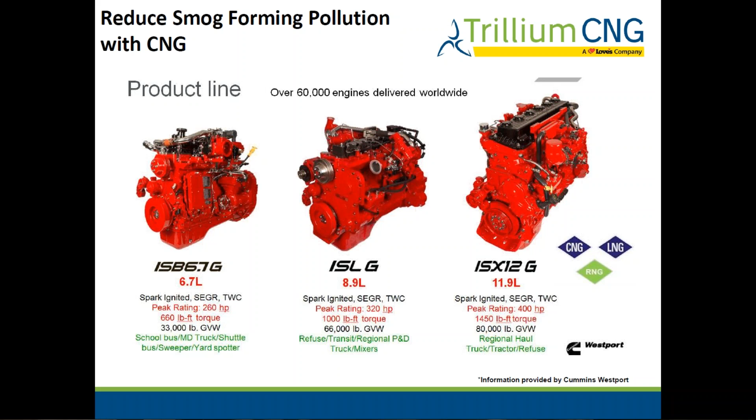These engines are available for transit fleets, refuse fleets, and a variety of other regional haulers. The larger engine, the 11.9 liter ISX12 G mentioned on the previous slide, all the way to the right, will be available at that same emissions level in the first quarter of 2018.

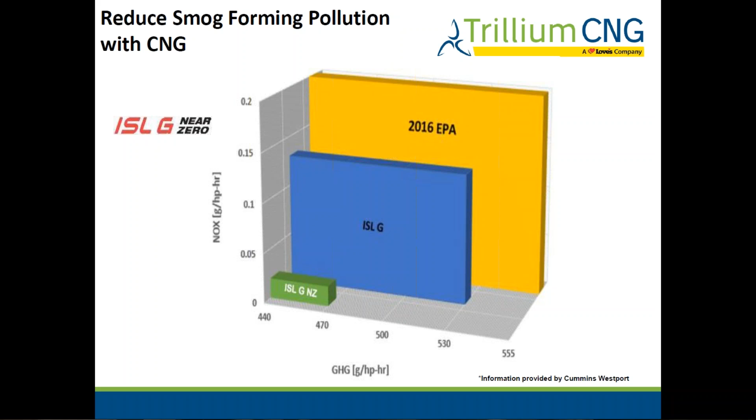Adding to the environmental benefits of natural gas is the renewable footprint, or the carbon footprint, that you can get with renewable natural gas. Let's go to the next slide, please.

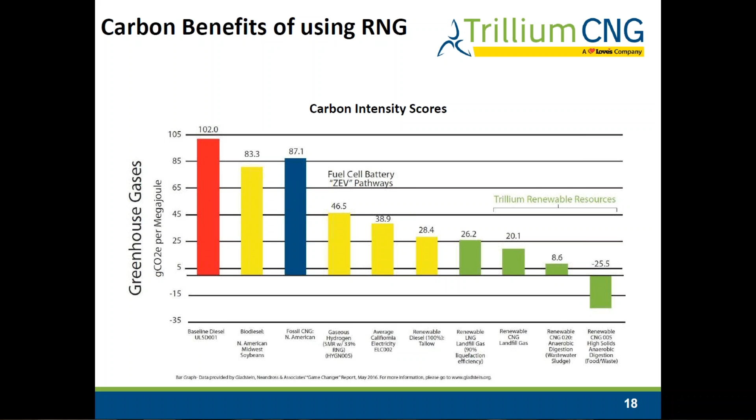So there's tremendous potential for the marketplace to move renewable gas into the transportation space. There are both federal and, in some states, programs that allow you to monetize the value of this gas and bring down the cost of your fuel even further. So if there's an interest in reducing your carbon footprint, providing additional sustainability to your logistics portfolio, and monetizing renewable fuel to bring down the overall cost of your fleet, renewable CNG provides the opportunity to do that.

So this is part of where the rubber hits the road. At this time, which is a remarkable time in the history of alternative fuels, there's never been a better opportunity to take advantage of state and federal incentives to help convert a fleet over to compressed natural gas. The benefit of this Clean Corridors program is going to be to leverage those funds as best we can to the benefit of fleets and private consumers looking to move over to alternative fuels. So now is the time for us to take this domestically available fuel, move it into the marketplace, and do so with the best incentives that have ever been available in the marketplace.

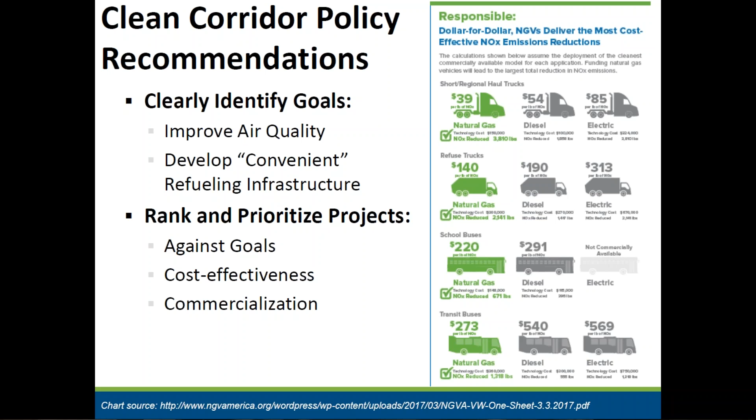Just to recap on some of the funds that are out there, I touched on the VW funding a little bit. We had limited time, so I didn't go through the DERA funds. I'm sure most folks are familiar with that, and there are a variety of state programs that vary state by state. But coupling these programs together into a bundle that can be utilized by fleets and other folks to move into the alternative fuel space will be the most effective way to utilize those dollars. And finally, to expand the role of the Clean Cities programs and coordinators. These are regional folks that are regional experts. They know the fleets and customers that are interested in moving over to alternative fuels. I think they can be used very effectively to align funding with prospective customers. I know we use them, but we don't communicate well with our competitors for obvious reasons. Using the Clean Cities coordinators or organizations as a conduit between competitors could be very helpful in identifying who and where would be the best locations to put fleets and direct vehicle dollars.

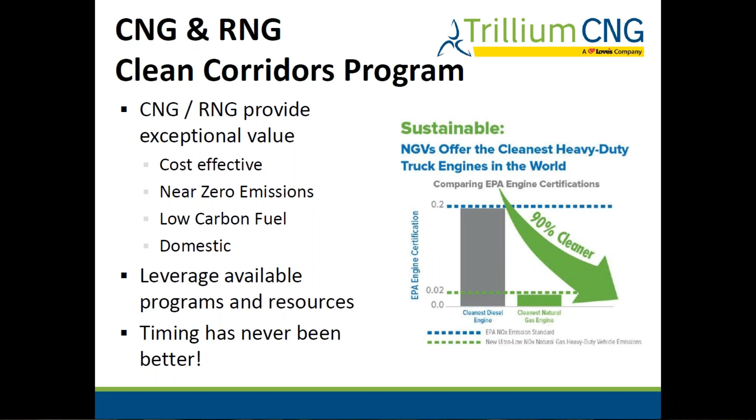I've got one last slide, just a wrap up here. Just to recap again on the value: CNG and renewable natural gas are very cost effective. They provide near zero emissions on NOx for point source emissions. It's a very low carbon fuel if you're using the renewable option, and the fuel is domestic, all things that are very good for our economy. In this program, I think we need to do everything we can to leverage all the available resources, including all of the federal and state incentives and the Clean Cities people to help bring these things together, and the timing has never been better. And with that, I'll turn it over to Susan.

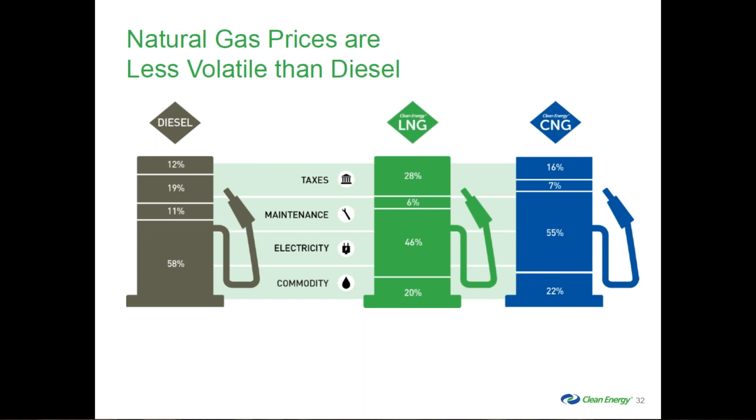So we offer all of these fuels: CNG, compressed natural gas; LNG, liquefied natural gas, which is supercooled gas stored in a thermos, basically; and Redeem, which can be sold either as CNG or LNG, and that is the renewable product I mentioned earlier.

What are the benefits of switching? Well, if you switch from gasoline or diesel to natural gas, it saves you money, you can dramatically reduce your emissions, and it benefits everyone. The community has quieter, cleaner vehicles on the streets. It's economical, it's abundant—we have a lot of natural gas in this country, not including our renewable sources—and it makes for a cleaner environment.

So people always say, well, how much cleaner? I'm going to show you a slide in a second. It's significantly cleaner. Safe—there's 17 plus million vehicles around the world fueling with natural gas. It's domestic; almost all of it comes from our country here. Fleets or shippers looking for green fleets give an advantage to people who operate natural gas trucks, and of course there's price stability and reduced operational costs over the long term.

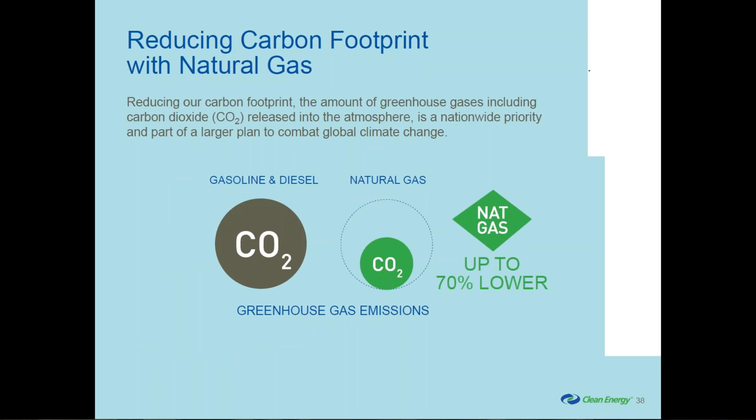So fueling the transportation industry—what does it take? Well, if you go from the well or from your renewable source to the station, you need pipelines, plants for the LNG, local utilities, compressors, the fuel itself, and you have to get it to the station. So what do we do? We build those—we have plants, we provide gas and LNG, we have stations. On the CNG side, we build compressors, work with local utilities and pipeline operators, and make those stations convenient to use.

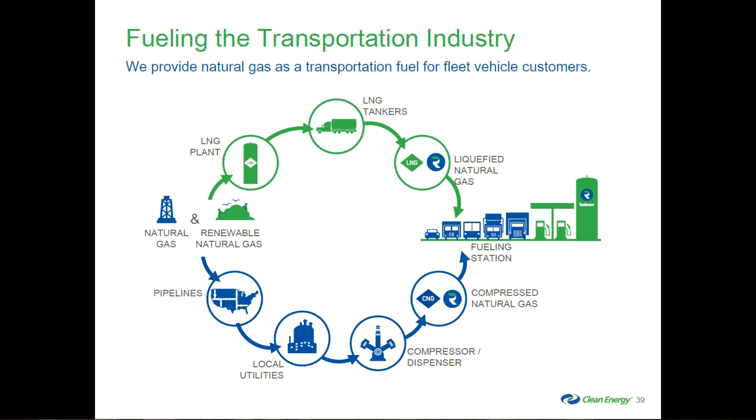But none of it matters if you don't have an engine. And as Bill said earlier, this new Cummins Westport near zero emission engine is a game changer. That engine, used with renewable natural gas, means you are driving the cleanest engine available today.

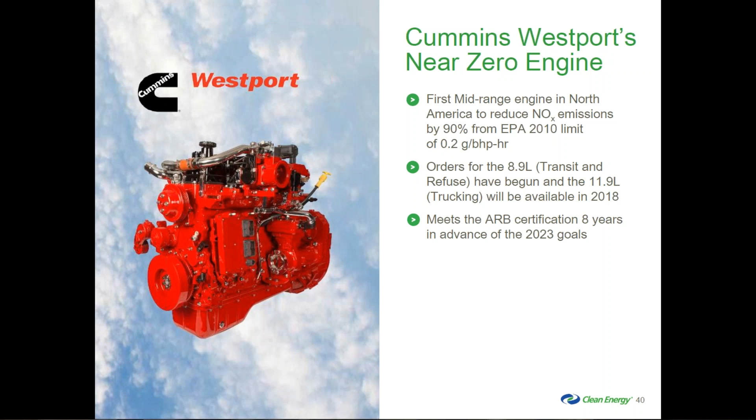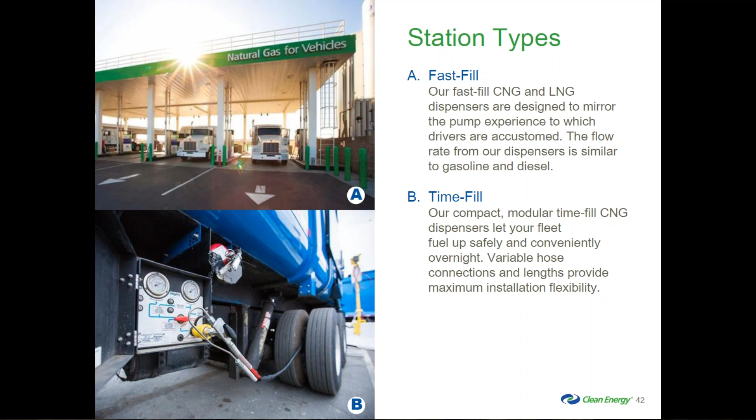For those of you on the call that don't know, there are two types of stations, and this is important. There are fast fill stations, which are your on-the-road stations—a truck pulls up, fills up, and continues on the road. And then you have time fill stations, where you have a window to fuel your vehicle while it's parked for several hours, and it fills up.

I don't want to go through the components of each station, but I know many of you are going to download these. For those that don't know, there is a difference with a CNG station: the gas is compressed, put into tubes, and then pumped out to the truck.

An LNG station: the gas is cooled at an LNG plant, pumped into that storage container, and then pumped out to the truck.

An LCNG station is the same as an LNG station, except it has a vaporizer. It heats the gas, puts the mercaptan in it, and sends it out to the trucks. If anybody has questions about any of those stations, please feel free to ask me later, but I don't want to take too much time with that.

So what are the differences? LNG is a diesel-like experience. It's fuel consistency, no problems at all. It's 100% free of impurities because they super cool it - no water, no compressor oil carryover, none of those problems that you have. And boil off is no longer a concern.

LCNG, again, fuels quickly - not as quickly as LNG, but it fuels quickly because that gas is just heated up. You have the same quality of gas because the inconsistencies or the impurities have been removed. No problems there. And then you have your CNG stations.

Again, 7 to 10 gallons per minute is not bad. Easy access to the stations. One of the issues is that since gas is heated up, it goes through a tube, you do lose a little bit to the heat of compression, but if you properly size your tanks, no big deal there. And then, of course, you have to worry about water, compressor oil, and natural gas liquids, but if you manage your filters, no issues there.

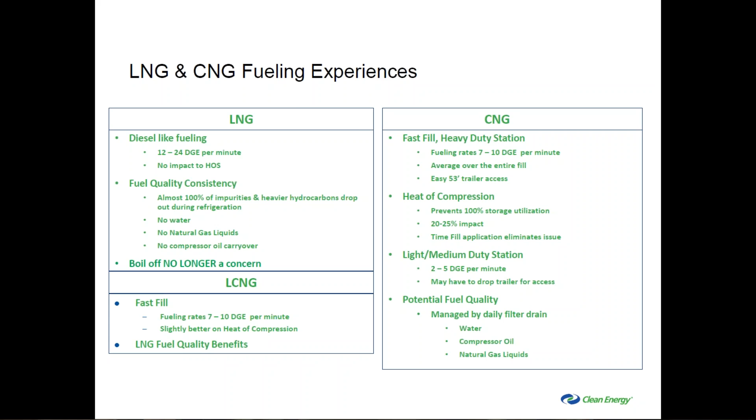And then the question is, what is success?

Success is satisfying our customers' needs. So when you're going to switch to natural gas, there's things to consider. You need a company to build your station - a lot of companies build stations, very good ones. So engineering and construction, you have to have the technology and equipment.

This is one that's overlooked consistently, and it's unfortunate, but you need to have facilities modifications. You need to have a bay where you can work on these vehicles unless you're going to work on them outside, and in the Northeast, that is very rarely an option.

So facilities modification is a big deal. It's a consideration when you're switching your fleet over from diesel, and everybody on the call should think about that, because it is a cost that is rarely spoken about when you're experimenting or testing, demoing vehicles, and then you have to make the transition to actually operating those vehicles.

And then, of course, financing and grants - we have a great financing and grant department - and then operations and support, a team to make sure that your station runs every day, because there's not a million of these stations. So if your station goes down, it's important that it get back up and running as quickly as possible.

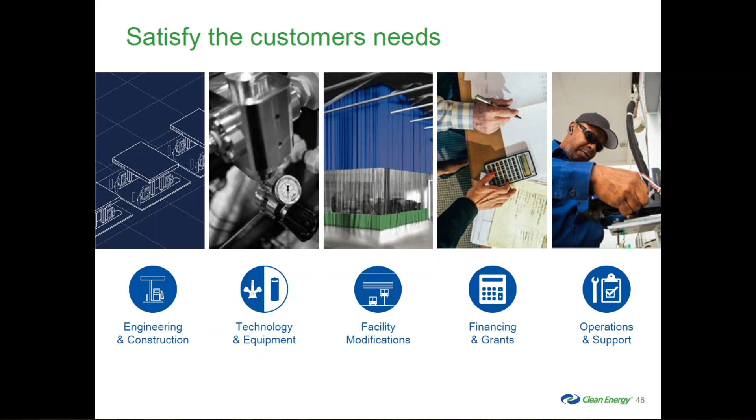And that facilities mod piece, I thought it very important to bring this up. Make sure that you either find a partner to help you maintain your vehicles, whether it be a Ryder, a Penske, a Penn Power, whomever it is, but they need to have the facility to do it.

Or if you want to invest in upgrading your facility, make sure you get the fire department on board, and then you get somebody that can do the inspections and make sure that your facility is up to snuff with your local fire departments. Otherwise, you could have some issues servicing your vehicles. It's a very important part of it.

And then successes - who's running natural gas? Because people ask, well, who's running it today? A lot of companies are running it. Honda runs it for their car carriers, Frito, FedEx - you see the list - Anheuser-Busch. These are big companies in America that are utilizing natural gas today.

Not an experiment, not a science project - it is a viable way to run your cargo throughout our country. But these companies have all done their homework, and they've all made sure that they would not lose any of their value prop with their customers when they ran these vehicles.

And then, of course, the biggest and greenest today is UPS. They run the largest package delivery company in the world. They operate a fleet of close to 100,000 vehicles, and they want to drive over 1 billion miles on their NGV fleet by the end of 2017. And FedEx is coming up right behind them.

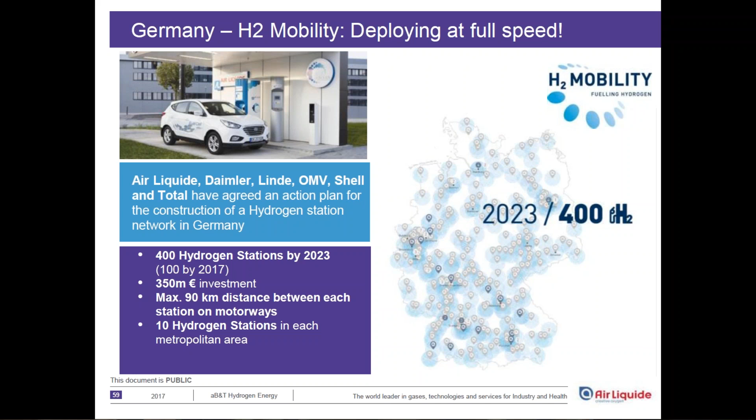Japan, which currently has the largest hydrogen infrastructure, expects 40,000 vehicles on the roads by 2020 and about 100 stations in that same time period. Japan has led partly because fuel cell vehicle manufacturers Toyota and Honda are there, but also because of their shift from nuclear to non-nuclear energy sources. They've driven toward hydrogen as their next generation fuel for stationary power applications, leveraging that for vehicle applications.

France is focusing on vehicles that are in fleets, especially taxis and delivery trucks. The first generation is taxis, where they'll have 600 taxis in Paris by 2020.

Denmark, a country very much driven by wind power and excess electricity, is installing electrolyzers to produce their hydrogen and is also building fleets of vehicles, including buses and personal vehicles, across their country.

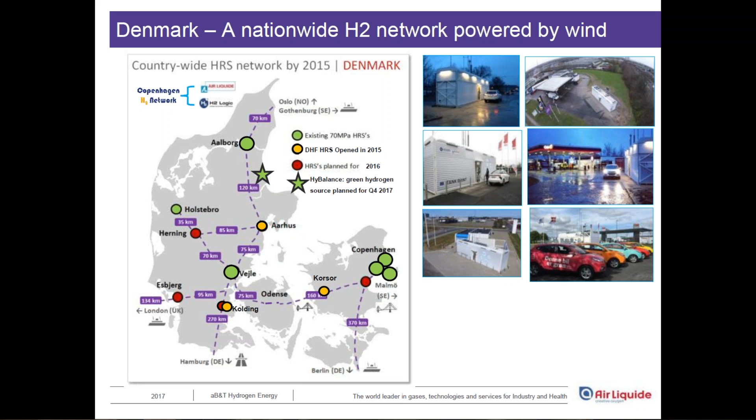In Korea, we expect 9,000 vehicles by 2020 and a matching number of stations in that same time frame.

The takeaway is that the infrastructure you're starting to see in the U.S. for personal vehicles is really a global movement. Car manufacturers globally are introducing these cars now by the thousands and tens of thousands, and we'd expect that in our lifetimes we'll see hundreds of thousands of these vehicles per year being sold.

I'm going to give a couple of slides showing what a station looks like. Our intent from Air Liquide is to have stations look and feel like existing liquid fuel stations, so it will look like the gasoline station on the corner, with the same look and feel and the same interaction with the consumer, except of course we're transferring high pressure gas instead of liquid.

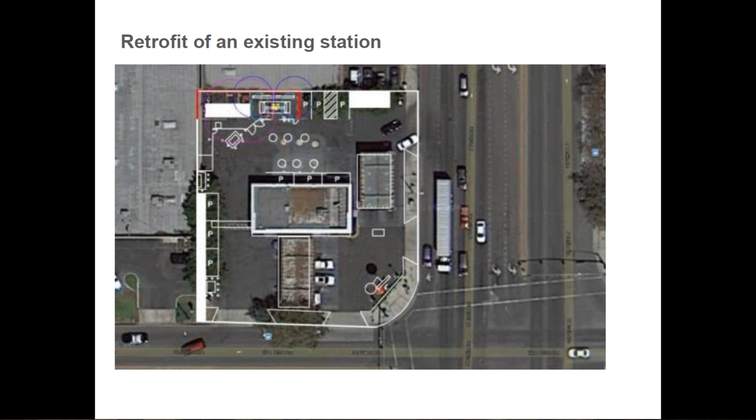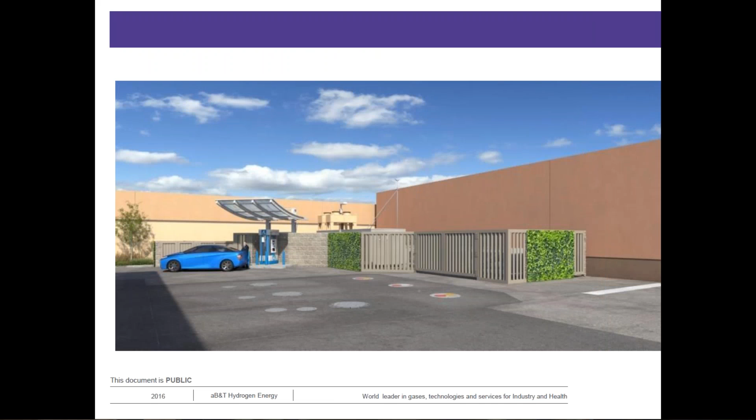For this audience, we want to talk about things beyond individual vehicles. I have some slides on freight and truck applications. I've pulled these off public websites and announcements from these vehicle manufacturers. I don't speak on behalf of the manufacturers, but I can give some updates on where things stand.

Buses tend to be one of the largest potential uses for hydrogen in large vehicles. The reason is that a bus or other captive fleet, which comes back to a single location for refueling, is easier to scale by building one station that supports many buses than building a network required for intercity transportation.

So one thing we'd expect in larger vehicles is that this model of captive fleets, like taxis for cars, buses for transportation, or delivery trucks and ports with a captive regional fleet, is where large vehicles will start. Eventually, as we get enough stations for intercity routes, you'll start to see intercity transports as well.

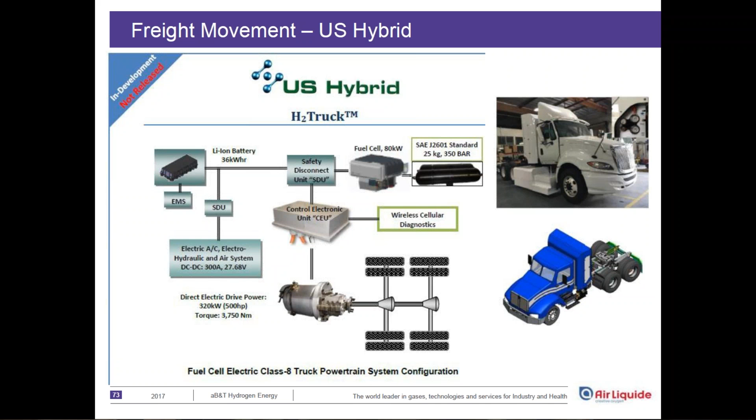At the Long Beach site, we have a Kenworth truck being converted to fuel cells for a demonstration at the Long Beach shipyard.

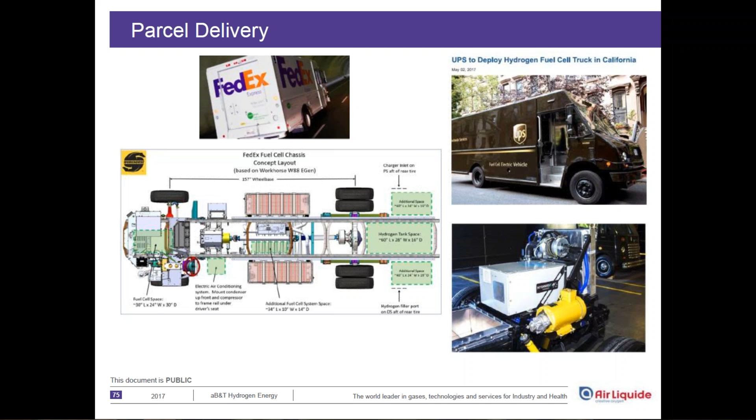At a little bit smaller scale, and back to what are essentially captive fleets, both FedEx and UPS have development programs today that are putting vehicles on the road, both in California I believe. These are cases where you've got trucks doing several hundred miles between fills, but at local fill stations.

There likely are going to be questions about things like APUs and refrigeration systems for vehicles, and there have been some development programs around having those be fuel cell powered. I would direct you to some of the developers for that, that's not an area that we've particularly worked in.

So from Air Liquide's perspective, and I've only got a few slides left, we are trying to enable this from the infrastructure perspective by leveraging the existing industrial infrastructure for providing hydrogen to things like refineries and pipelines to chemical plants, and now converting this over into a consumer fuel.

One of the things that we've done is we've been one of the pioneers for the Hydrogen Council. The Hydrogen Council is a number of energy companies globally that have combined together to commit to spending $2 billion per year investment in infrastructure in the hydrogen economy. So if there's a question about, are the big companies behind this? Is it a global phenomenon? Is it for real? These are the kind of indicators that should convince you that yes, these are real activities that are going to continue for the next generation.

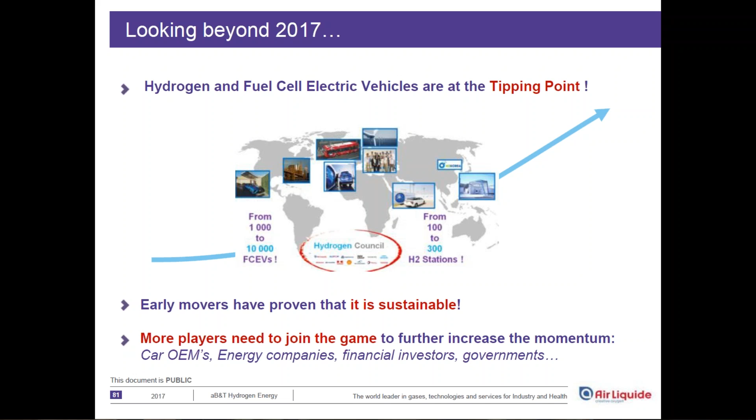And so we've reached that tipping point. We've gone from the laboratory to commercial development. We've proven that it's sustainable, and as more players join the game, we simply are gaining momentum and establishing that place in the markets.

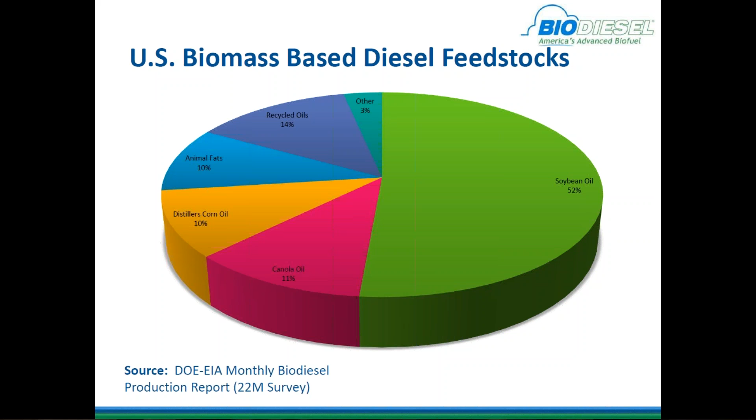If we look at the next slide, this is the carbon intensity values that the low carbon fuel standard uses in California, and you'll see that the used cooking oil on the lower left side of the chart is the cleanest, lowest greenhouse gas emissions that are available from many of these types of fuels. So by keeping to the used cooking oil sources in New England, I think that would be a good start.

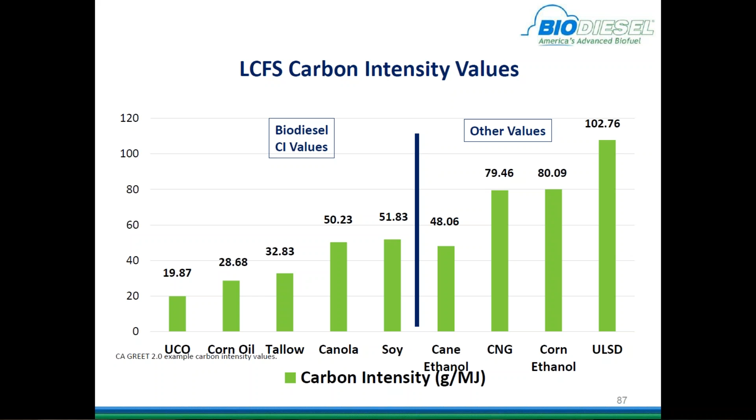And so, really being able to make use of biodiesel to reduce the greenhouse gas emissions from the diesel vehicles that are out there would be a key objective, I think, of the Clean Corridor program.

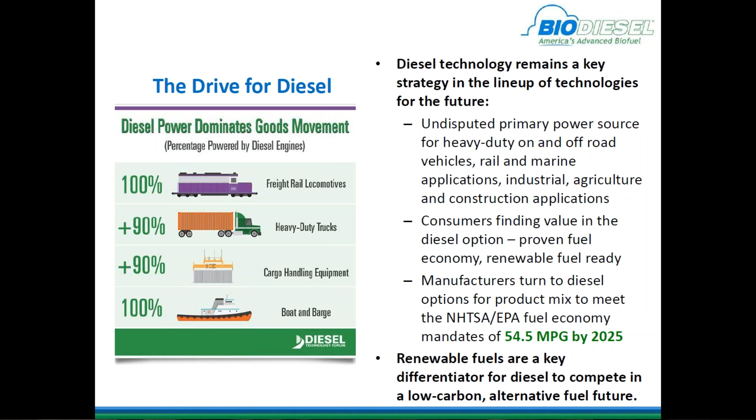So let's go to the next slide and see how biodiesel ranks among the fleets for alternative fuel usage right now. This has got a couple of surveys showing that 18% of the fleets use biodiesel now, and that's increasing over time. So, as we try and get more biodiesel available to those fleets, I think it's going to just grow over the next few years.

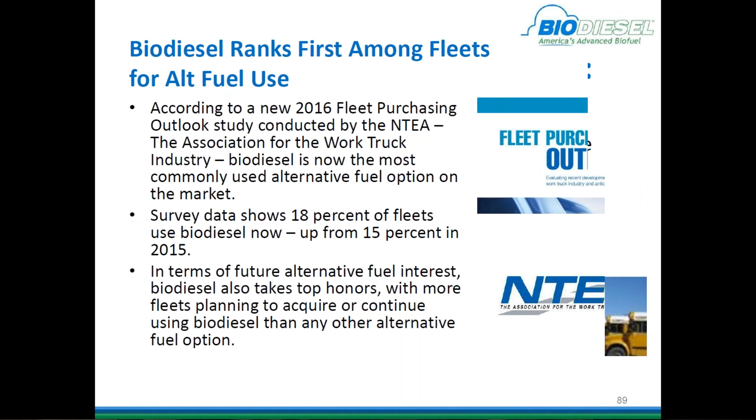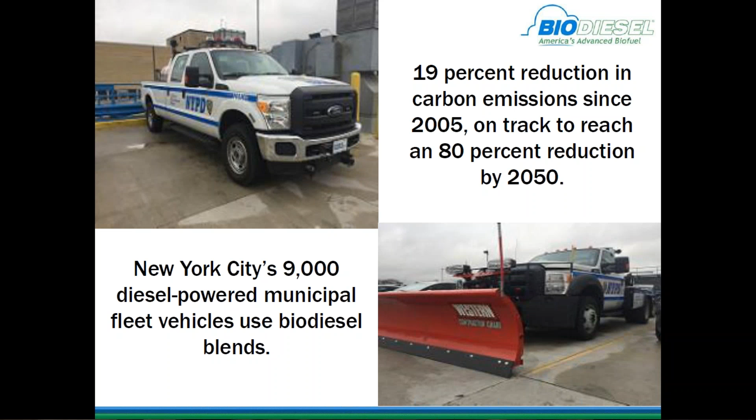Illinois has a mandate for B11, 11% biodiesel in all of their fuel, and Minnesota has B10, a 10% blend in the winter, going up to B20 in the summer. So these things are all happening, and we need to get more and more of these higher blend mixtures working for the future.